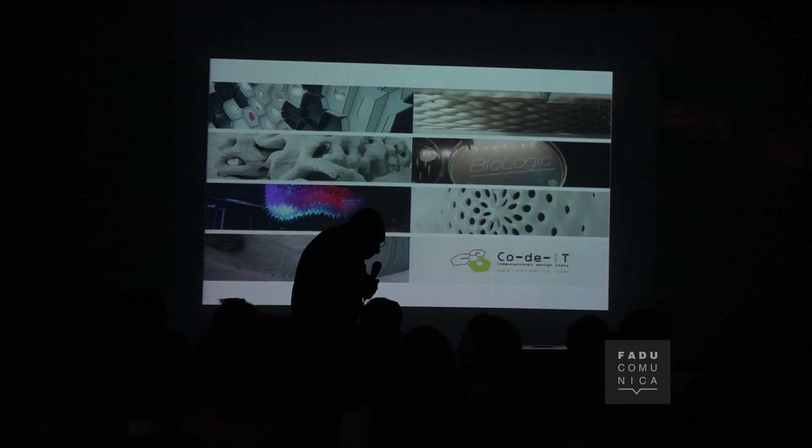As Rodrigo told you, I'm part of Co-de-iT. Co-de-iT is a sort of Italian hub about computational design, and I want to describe it as a hub because it's just connecting people that want to use computation as a design medium in very different disciplines. So the common interest is to use computation as a medium in order to describe. We are actually a huge group. Many of us are working all around the world, spread in different offices, but we are working on some specific research together.

I want to start the theoretical framework part of the lecture with a quote from Kevin Kelly. It's a quote from one of his latest books, What Technology Wants. It's not that new, it's a 4 years old book. If you don't know him, maybe you can just check on Google, but he has, I think, one of the most interesting points of view about the use of technology in the last years.

In this book, he's saying: about 10,000 years ago, humans passed the tipping point where our ability to modify the biosphere exceeded the planet's ability to modify us. That threshold was the beginning of the technium. Now we are at the second tipping point, where the technium's ability to alter us exceeds our ability to alter the technium. So we are living in a new age, a new era, where technology is changing us more than our ability to change the technology itself.

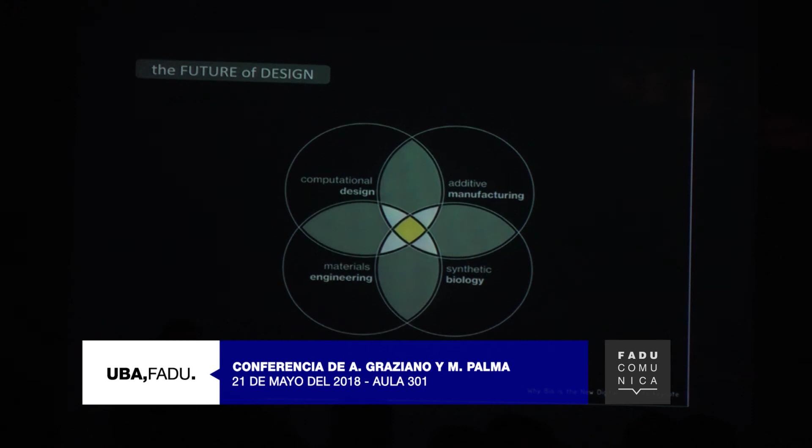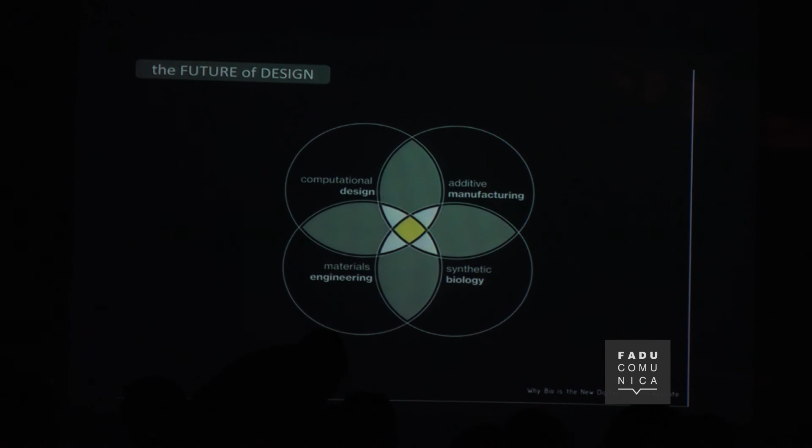During the same lecture, Joi Ito, the director of the MIT Media Lab, showed this diagram that was really interesting and is still very interesting for us. Basically, he was saying that the future of design will be a sort of intersection of these 4 disciplines. Computational design first, and we were mostly into that. Then additive manufacturing, and that was the time when we started to research additive manufacturing technologies and techniques. Then material engineering and synthetic biology. So those 4 different knowledge fields will be the common ground for the future of design.

So I want to start to show you some slides about what's going on around us and which abilities we developed in the last 10, 20 years in order to manipulate matter and materials. If we don't know our abilities, the technologies that are available to deal with materials, we can't really understand what we could do with the material itself. And as architects and designers, this is really important. If you don't know the framework where you are working, it's very hard to define your projects.

So the first slide, obviously, I think is very familiar to every one of you: a 3D printer. And Neri Oxman, some years ago, was talking about 3D printing this way. As the Gutenberg revolution allowed anyone to print books, democratizing information, 3D printing is revolutionizing the way we do fabrication. In some way, we can all make.

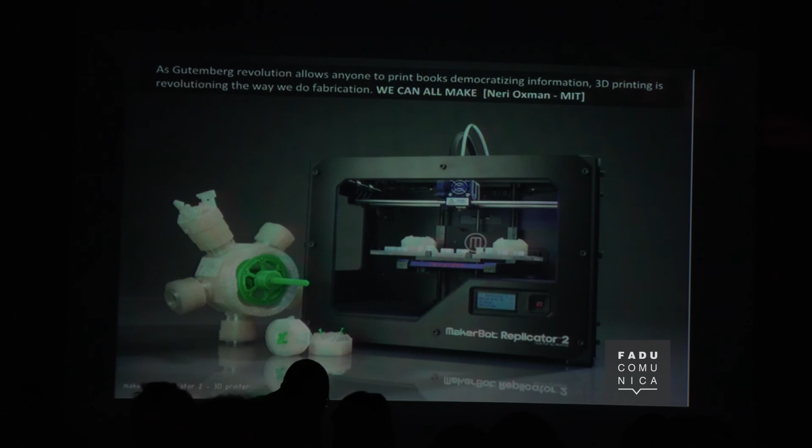But our point of view as Co-de-iT about 3D printing is slightly different, maybe, from the common idea of 3D printing. 3D printing is not just giving some shape to some materials, but a way to add several layers of information during the fabrication process. Why? In the standard 3D printer you can define how and when you release the material, and the position of the release of the material. So basically you have one layer of information, the position of the material, but in this image you can see that there is some other information about the material.

Basically there is another layer of information that is about the color. So for each voxel, a voxel is a pixel in 3D space, you can define not just the position of the material, but also the color of the material. So it's another layer of information.

Then, always in the same object, the matter could change from very stiff material to very soft one. So basically, the change of color is related also to the change of the stiffness of the material. So you have another layer of information, and you can manage the material itself going from a very stiff one to a soft one. If those are the rules that you can use in order to create your design, you can understand that you have 3 different layers of information that you can play with in order to create something.

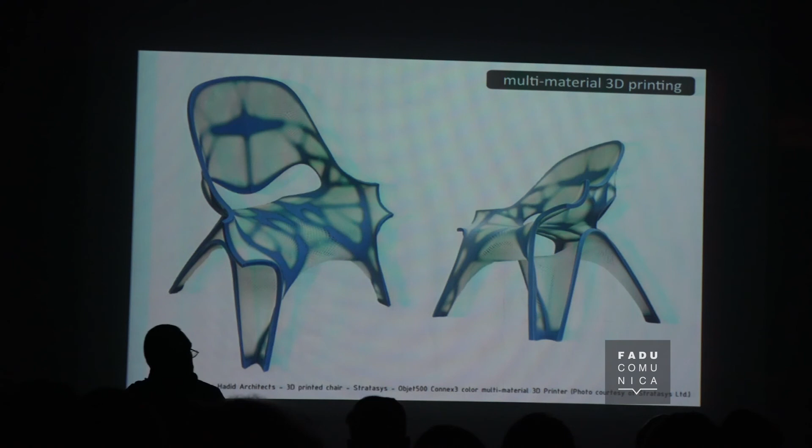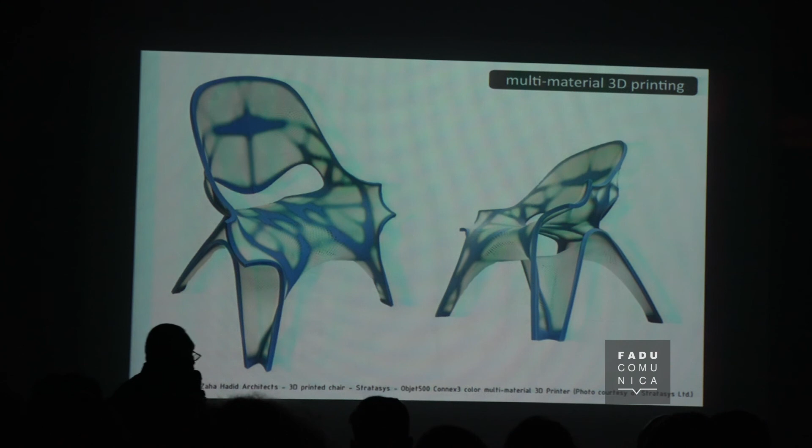And some architects, already some years ago, started to play with those kinds of technologies and the opportunities that those kinds of technology provide to us. This is a very famous chair from the Zaha Hadid Architects Studio, and basically the change of color is related to the change of density and stiffness of the material itself.

So the blue voxels, let's say, are related to the most stiff material, and the position of these blue dots is related to some topological optimization processes. So basically, you can define where you need more material and the rigidity of the material that you need in the same object.

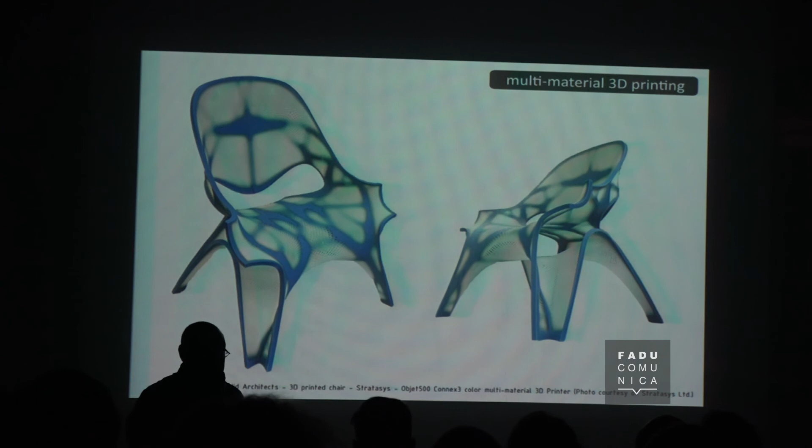So you put the rigid material just where you need it, and the other parts of the chair are really more light in some way. So you start to adopt the material just where you need it. Then we started to use the material in a very different way. This is a sort of mechanism, a mechanical part, but not in metal parts.

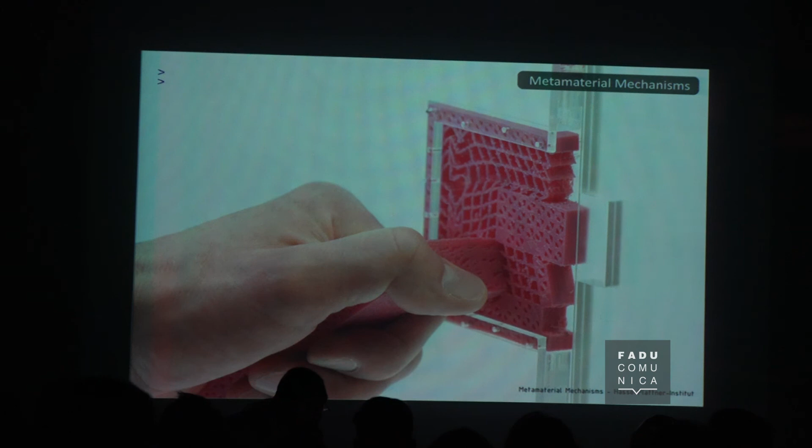It's made by some rubber, but the topology of the deposition, so how you distribute the material during the deposition, will define how the final object will work, assigning some forces to some parts. So it's a sort of door handle that really works really well, just driven by the topology of the material.

Then we started to see something really new. This is so-called 4D printing. 4D printing is not just to print something that could move. It's something really different. It's a 3D printed object with another layer of information that's about how the object behaves in different environmental conditions.

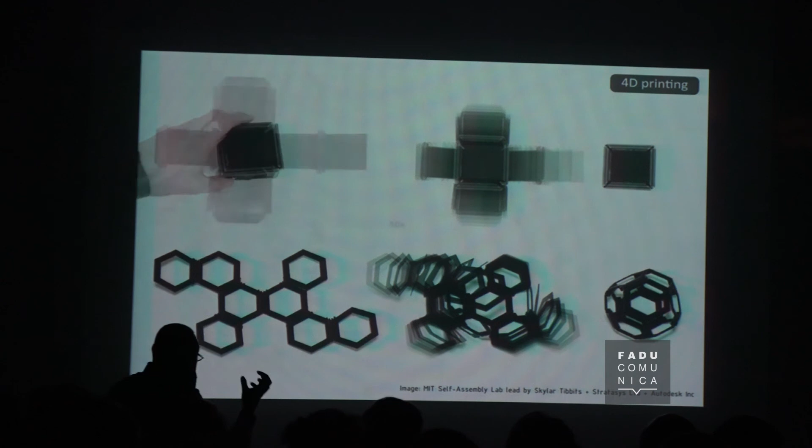For this object, that was 3D printed at the Self-Assembly Lab at the MIT Media Lab by Skylar Tibbits, there are different layers of material in this cube, and one layer is a sort of plastic, and another layer could react when you put this kind of material in water. So basically, this second layer starts to shrink in the water. And so if you know that you have this double layer, the material, when it's put into water, starts to shrink itself and will define the shape of the object in different conditions. So 4D printing is about changing the properties of the material in different conditions.

But our ability to manipulate the materials could really reach smaller properties. That's a very old image. It's from 2012, and it's about nanoprinting. So our ability to define the material properties is going to be at the nanoscale. This looks like a still object, but this is not a still object. Those are two nano mechanisms that could be printed. So you can imagine having some materials that at the nano level could embed those nano mechanisms.

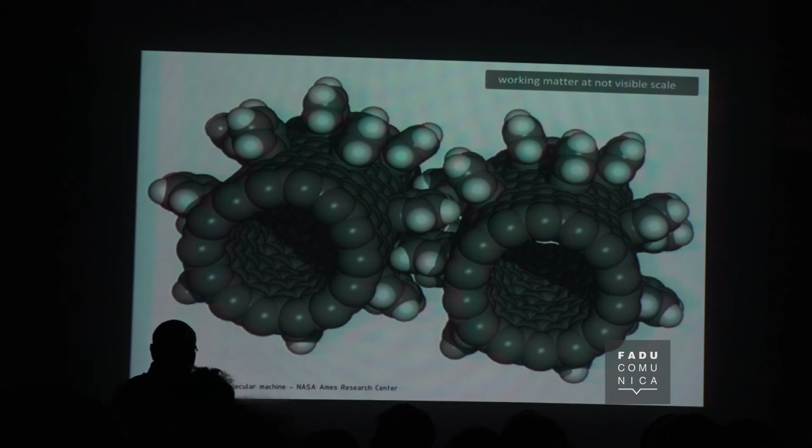Can you imagine some fabric on your jacket with those nano mechanisms, and when you move your arms, that scale of movement provokes a really big energy at the nano scale. So you can start to think about storing energy in the material itself. And then our ability could reach even further points.

This is an IBM video. It's called A Boy and His Atom. Basically, the video is a video recording of some atoms. So our ability to define the material is going to be at that level. Like this one, this is a molecular 3D printer.

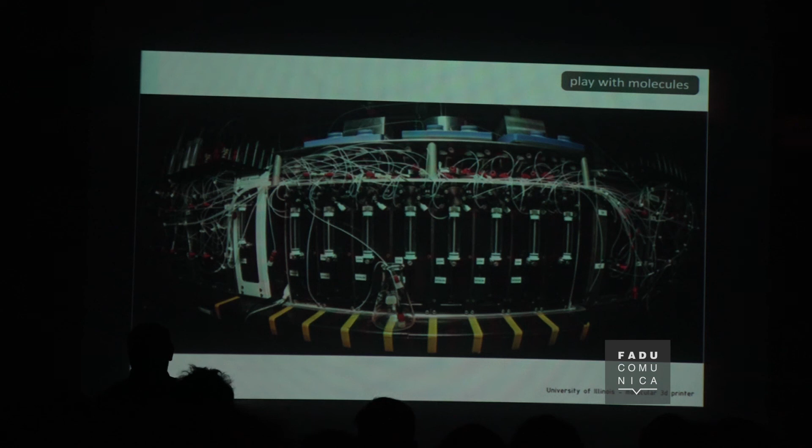So basically, you can print atoms one by one, defining the final material. If you can have all the ingredients made of atoms, you can define which is the final material that you have. So those are the technologies that are actually available, obviously not in architecture, not in design, still not, but it's going to happen.

This is, for instance, a material that could change from solid to liquid by the atoms' connection, driven by some magnetic forces. So basically, we can define some material that will change state, from the solid state to the liquid state, by some magnetic properties.

Then, our ability to manage different materials started to jump into a completely different field, that is the bio field. So 10 years ago, this was one of the first companies, EnvisionTEC, that put this 3D bioprinter on the market. Basically, it was a very expensive one. It was about creating and printing some bone parts or soft tissue or drugs or bio skin in order to replace the skin in injured persons.

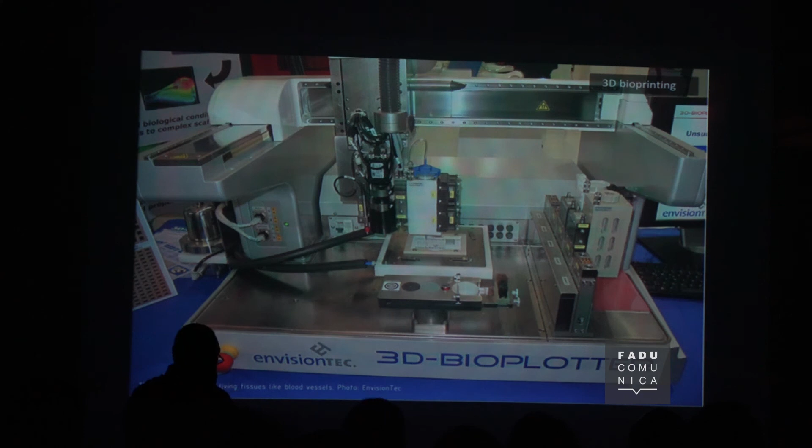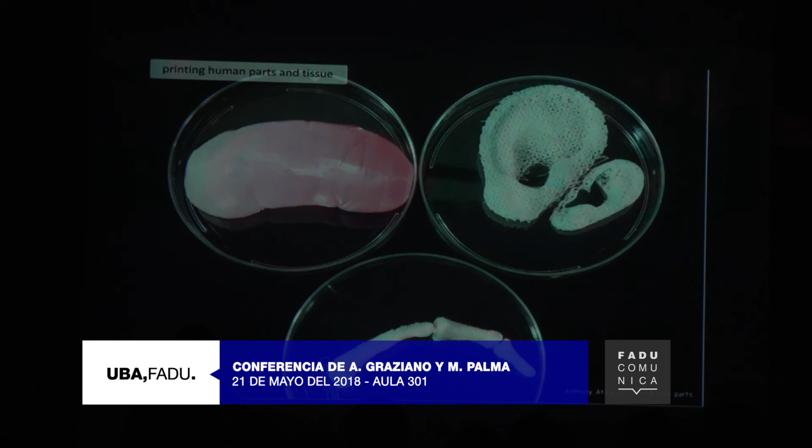Anyway, this 3D printer started to show that not just the common materials could be organized with these kinds of processes, additive manufacturing processes, but also biomaterials. And in a couple of years, some doctors, this image is taken from research made by Dr. Anthony Atala, started to 3D print organs, basically. You can see a fully functional kidney on the top left, then some scaffolds for new ears, and some finger bones.

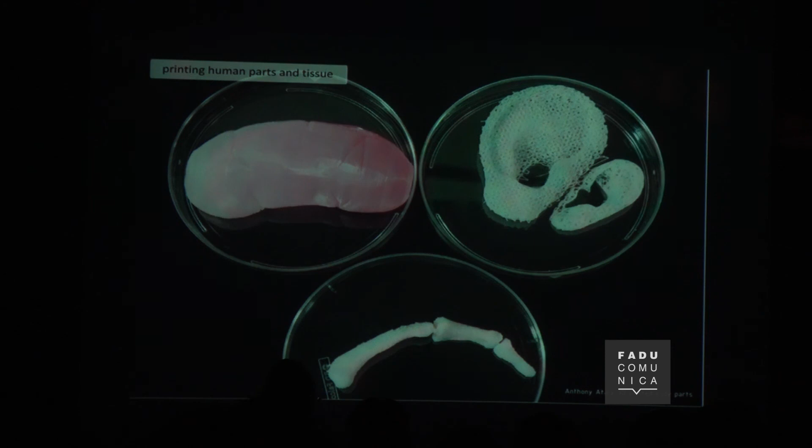So we started to jump into a completely different field where we could start to imagine using biomaterials. This is an image coming from the Wyss Institute, and it's about using some composite biomaterials that change their properties when those structures are placed in water. So the material itself started to react and change its shape.

This is another very famous project from the MIT Media Lab. It's called BioLogic. It's a sort of fabric that reacts to changes in temperature and moisture. So basically, it's made by some biocomposite. The name of the composite is natto. It's something that is inside the rice stalks, and it's a material that changes its length. So basically, it shrinks by the atmospheric moisture. So as a fabric, if you wear it, it changes shape driven by your temperature and your level of moisture.

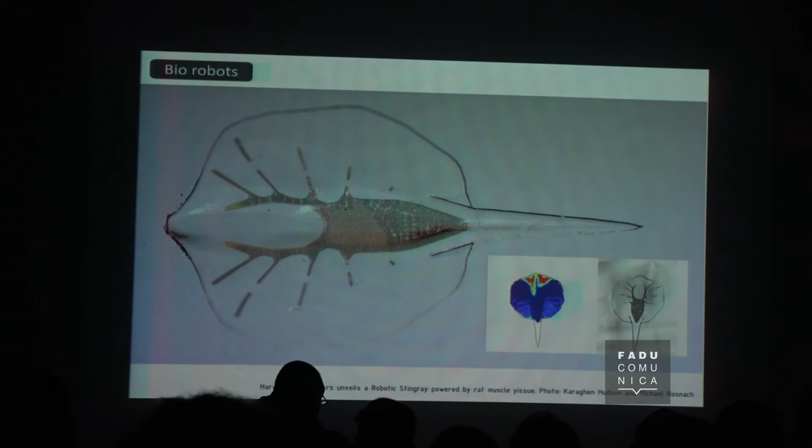But our ability to work with biomaterials is going further, and this is a project called Stingray. Basically, it's a completely 3D printed object. The skin is made by a gold part, and the living part is made by rat cells. Basically, the rat cells were modified in the DNA code in order to react to light stimulation. So as you can see in the very small images on the right, with the right amount of light, the 3D printed object started to move its own shape according to the light source.

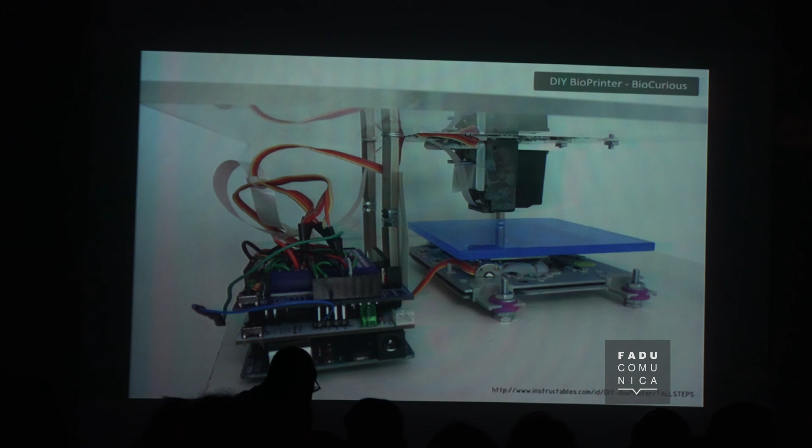But if you think that all these kinds of things are really far from you and really expensive, this is a very old image from 2010. This is a DIY bioprinter made by the BioCurious lab in Sunnyvale. It's a project to make a 3D bioprinter with $150. So it's a technology that you can download from Instructables, a very well-known website about DIY technology, and you can download it and assemble it on your own.

And those are the first tests that they did in the lab, basically 3D printing some food for some glowing bacteria. So basically, if you're 3D printing the food position, the glowing bacteria will obviously reach the food, and this is the final result.

But we are literally entering a new era of design. And we also have to define and understand our position as architects and designers in this kind of new framework. For at least 15 years, a lot of industries have been trying, and in the last 10 years they also figured out how, to decode DNA sequences. So basically, we are able to read the DNA code of every living being and to sequence the instructions inside of it. And our ability is not just in reading DNA, but also in writing DNA.

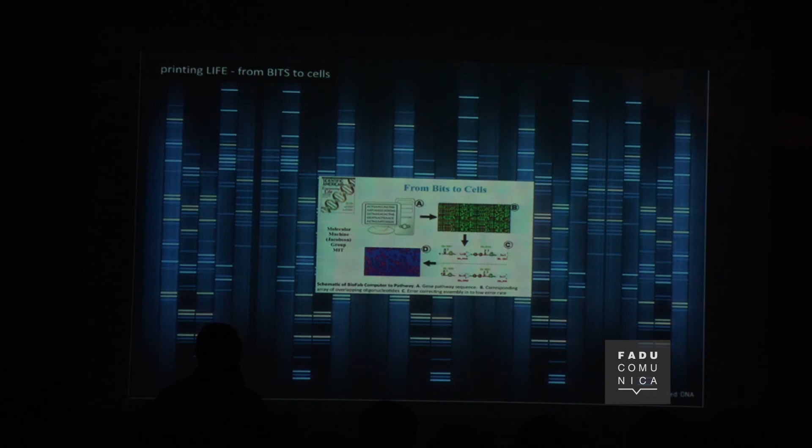If 10 years ago writing a string of DNA was really expensive, now it's something really cheap. You can read the entire human genome with $100, and you can write it with $1,000. So it's something really cheap, actually. And some institutes started to think about what it means to be able to read and write DNA.

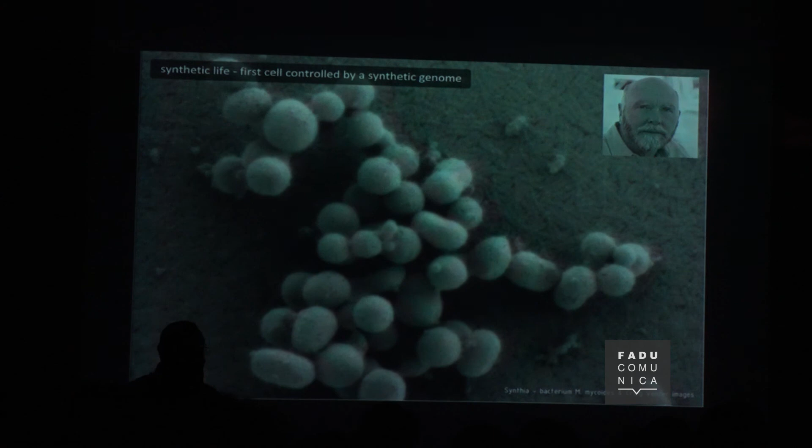It's called the Mycoplasma mycoides, and they extracted the DNA from the scaffold of the bacteria. Then they completely discarded the DNA itself and kept just the scaffold. Then on a computer, they programmed the new DNA, and they fit the new DNA inside the old scaffold. And after a few hours, the bacteria started to do two things that are the fundamentals of life: eat and reproduce. Those are the foundation of life.

So basically, for the first time, we have a completely synthetic form of life on the planet, something that we code. It's very important. And since this experiment, a new scientific field started to arise. It's called synthetic biology, and basically it's the design and the construction of biological devices and systems. So actually we have the opportunity or the ability, I don't know how to call it, as an architect or designer, to start to think not just with still matter, but also with materials that are biomaterials, and to think about it in terms of design.

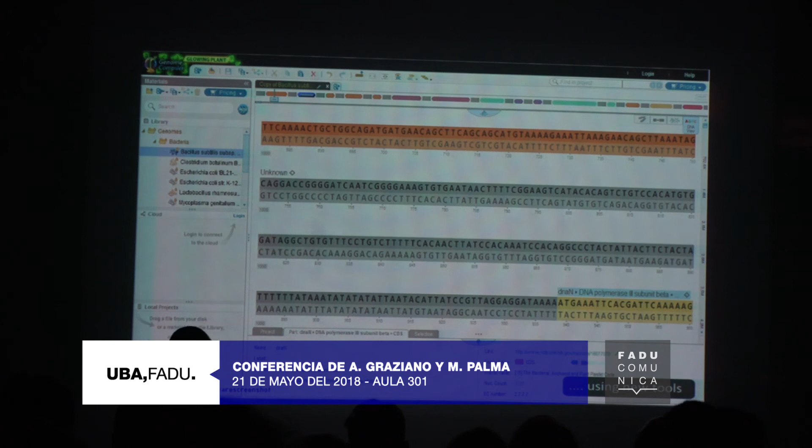And if you think it is, again, something really far from you, this is a screenshot from my laptop. This is an app where you can start to take some samples of DNA strings from very different sorts of bacteria. Those apps are free, and you can find around 1,000 on Google Play. You can start to take some strings and to play, or to design maybe, it has more sense. But you can start to play with the DNA strings.

Maybe you can't read that, but on the top right, there is a button with the name pricing. So basically you can start to play with it and then ask the price in order to print it. I did it 2 years ago. In 3 days, you have the new strings of DNA inside the pipe. Obviously, I don't know what to do with it, but just to test the process. Keep in mind that just in the United States, the number of bio garages where kids and very young people are playing with biology is more than 1,000. The FBI has a new department just for that kind of thing.

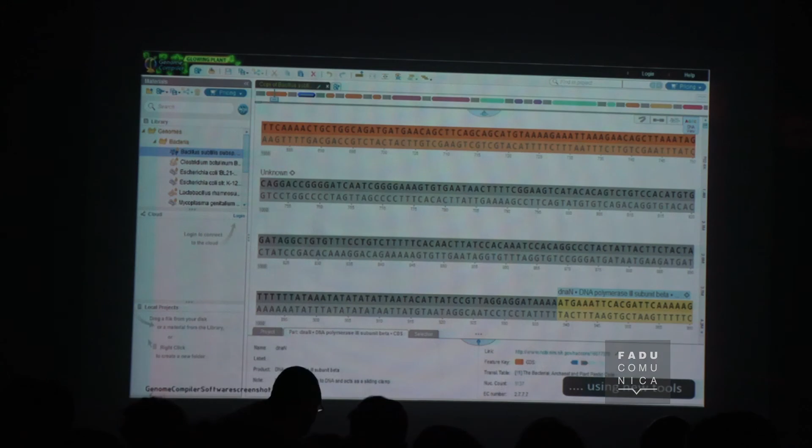So what we were doing on our laptop using the usual code, the 0 and 1 language, is happening also on the other side, using the molecules and the cells as hardware and the DNA as operative system. Keep in mind that the DNA is the operative system of nature, okay? So in those last 10 years, we are building the bridge between those kinds of languages. So actually, we are able to jump from one side to the other, from 0 and 1 to ATCG language.

And obviously, I'm pretty sure every one of you is asking, okay, why do I have to be interested in that? Why is it very important for my studies and so on? This is an image I took from the Skylar Tibbits website maybe 3 or 4 years ago. It was about 3D printing the longest chain possible in a fixed size volume, okay? How can I fill the space with the longest chain?

It has a very specific name, this process, that I don't remember now because I can't read the slide. Sorry, I will check later.

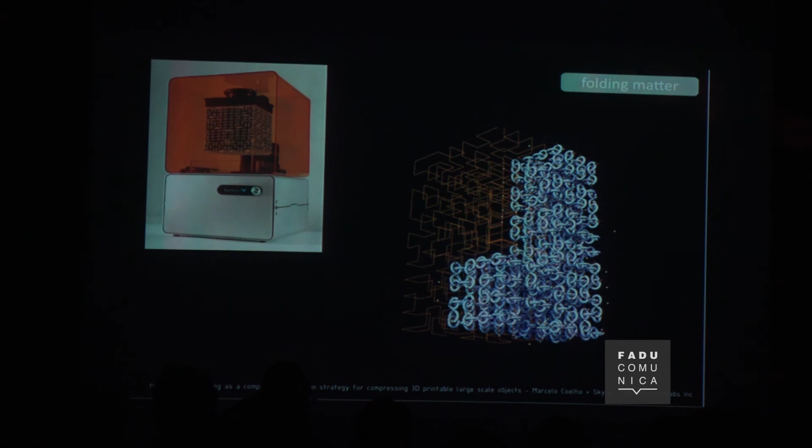Anyway, you have to build an algorithm that is filling the space with a specific object. The same is happening in biology, because the way the DNA works in order to read the sequence itself and start to trigger some specific function is defined by the way you fold the DNA. So folding the DNA is the way you define at which time every string will be activated. So folding the DNA is a very strategic way to define how a biomaterial is working.

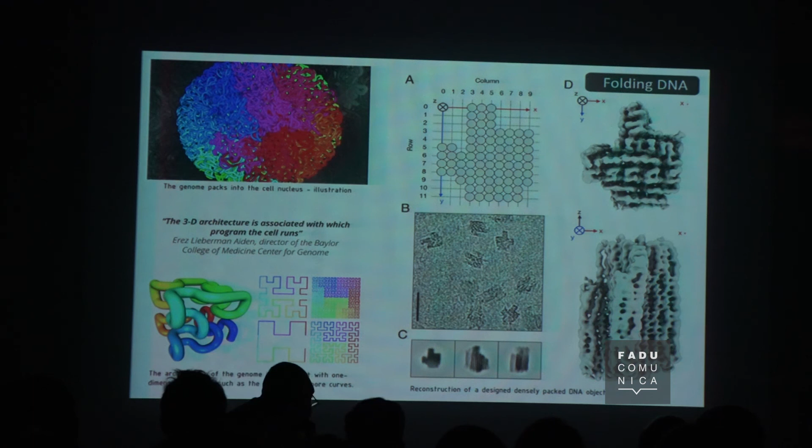And as you can see, they are using exactly the same tools, exactly the same computational approach. So computation is the bridge between something that is happening in architectural and computational design, and on the other side in biology. And if you don't trust me, this is a 4 years old image from the Autodesk website. Autodesk has been working for years

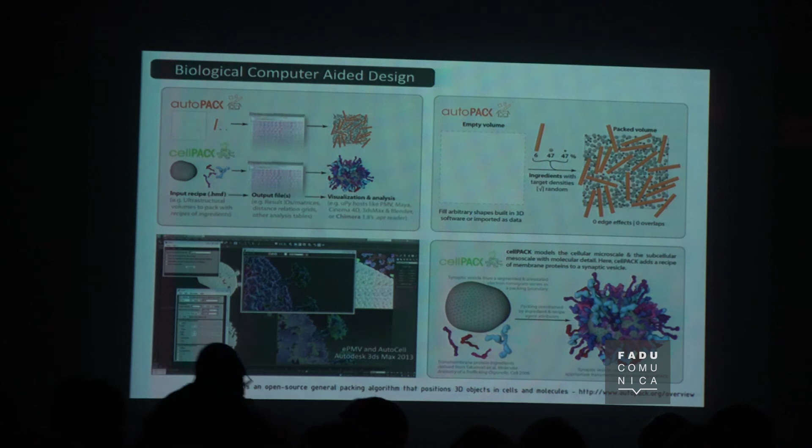on a project called Project Cyborg, on some software in order to design and define the biological properties of the materials. Those are some plugins you can install on 3D Studio Max, on Blender, on Maya, all the computational graphics software, in order to start to define the bioproperties of the materials.

So this is another quote from a very interesting interview with Andrew Hessel. Andrew Hessel is a bioprogrammer leading the Autodesk research project. And he was saying every living thing on the planet uses the same operating system, uses the same programming language, from bacteria all the way to us, and everything in between. DNA is the program of living things.

So now we have a clear path from bits to atoms. You remember the famous MIT slogan, from bits to atoms, to biology. We actually are becoming responsible for every living thing on the planet and choose what we want to create. Not survival of the fittest, but construction of the intended. The next programming paradigm is life science.

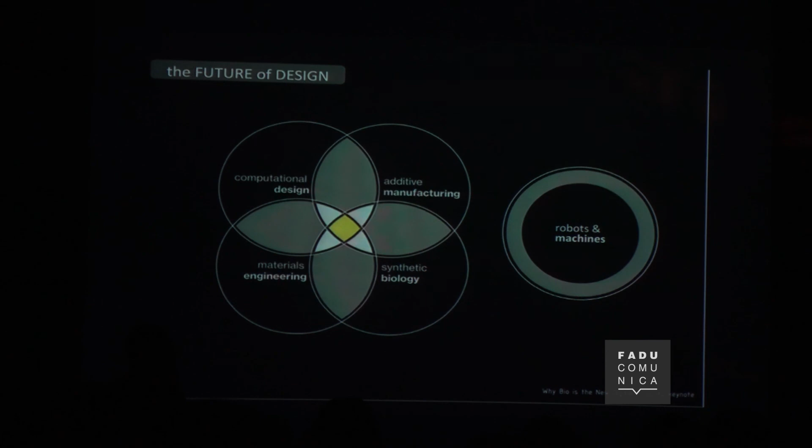I have to shortcut a little bit because I'm running late. And I want to go back to one of the previous images I showed to you. Do you remember the four fields that Joi Ito was using to define the future of design? I would add another one, because in those four fields, we are missing the actors. Who is going to do that?

And I think that robots and machines are another very important field of research that we need to start to use and to explore. We are witnessing the rise of computation as the design medium, and this is something that we already understand. But we also need to define how we do that and how we use our processes in order to inform the material.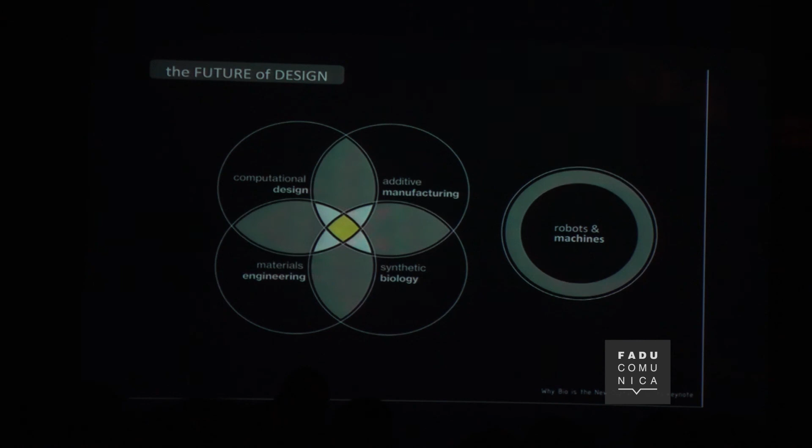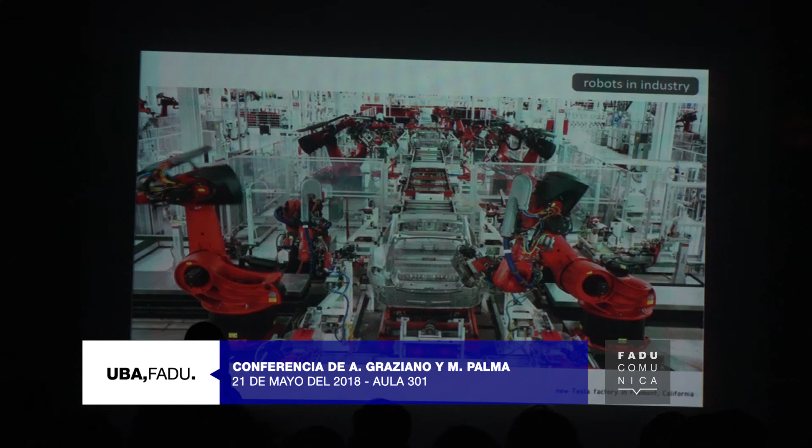I consider robots and machines as technologies that are able to execute series of instructions. So I'm not just thinking about 6-axis arms or something like that. We can range literally from very small robots to very big ones, very different also in topology and morphology itself.

This is the new Tesla factory in Fremont, in California. And as you can see, the robots are widely used, but robots have been in use for 40 years. Robots are really old in some way. It's a 40 years old technology, and obviously it's already in every automotive company, in aerospace factories and so on.

This is the daily shipping in Shanghai from KUKA, one of the biggest companies all around the world. So in the next 2 years, China alone is planning to sell more than 2 million robots. So you can imagine how robotics will be in some way pervasive in our world.

But since, I could say, 10 years more or less, architects and designers are also starting to be interested in the use of this kind of technology in the architectural and design fields. This was one of the first, let's say,

robotic performances I saw, made by an Austrian studio, Kram/Weisshaar, and it was about cutting some stools using an app where you define 3 curves, and the intersection of the 3 curves in the 3 directions of the stool will define the final shape. And in a few days, they were able to collect very different shapes from different participants to the event. So it was a way to show that robots were not that far from something that could be related to

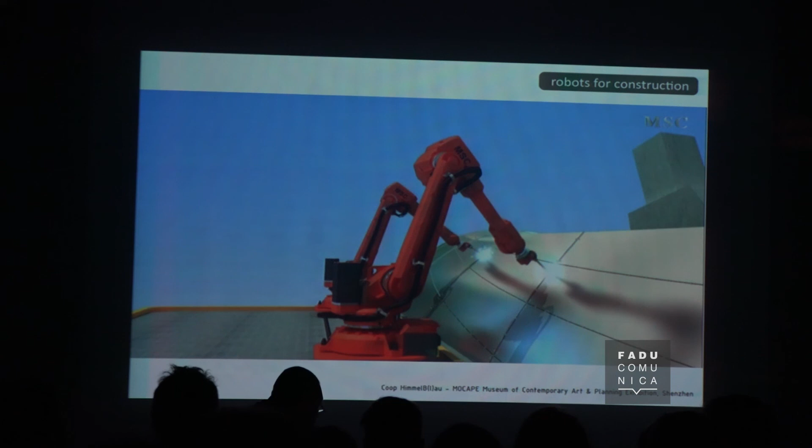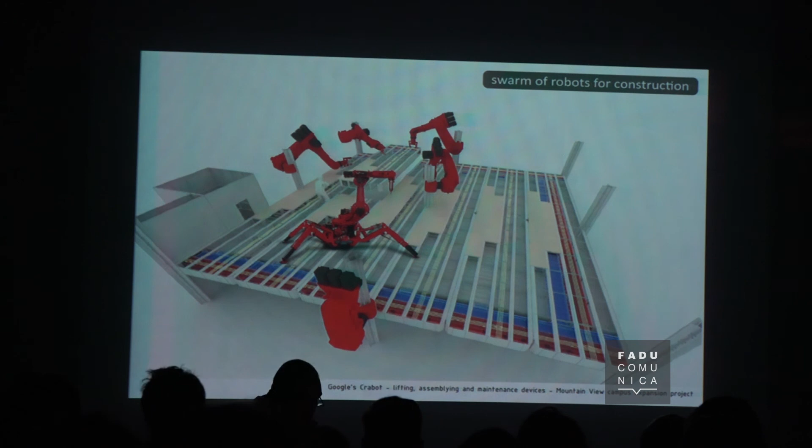So architects are starting to get used to thinking not just about the material or the shape of the building in itself, but the processes to build and to use those kinds of technology on the building site. This is another image from the supposed Google headquarters. And as you can see, the robots are not just robots anymore, but there is a sort of speciation of the robots. So robots are going to be different because they have to solve different functions during the building process. So basically, there will be robots that will deliver the material, other ones welding and doing different tasks.

This is one of the most famous robotic pavilions in which robots were extensively used. And I really like to think of this pavilion as a sort of paradigm shift in architectural design and processes. A new generation of architects and designers are starting to get used to those kinds of technology, to understand the language of the technology itself, and to start to use the technology in the building processes. I don't want to say in the building in itself, but we are talking about building processes.

In this specific pavilion, for 1 year, the PhD students and the master students started to develop not just the shape that is inspired by some biomimetic properties, but to define the tools, to build the tools in itself, to define the materials, because they literally designed the materials that they used, and then the process in order to build the pavilion itself. So the students and the PhD students were able to define the entire process from the very first idea to the building process in itself.

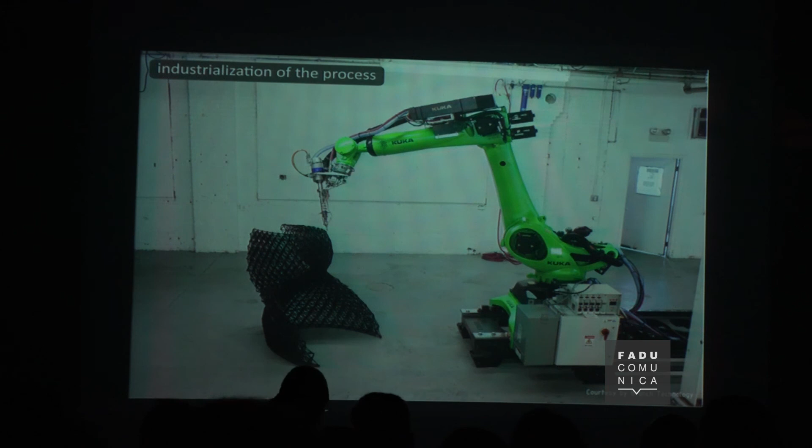And this is something that is going further. I think one of the main bottlenecks that we have now in order to move from the research lab to the industries is first the regulation of this kind of process. It's very hard to move from a lab to the certification of the processes itself, but it's going to happen. It's just a matter of time, probably. Few companies are actually on the market, but the number will grow for sure. And they started to deliver this kind of additive manufacturing process in the real building site world.

This is another example, a very new one, the MX3D bridge made by this company. Basically, they 3D print metals, and they 3D printed the entire bridge in one piece, let's say. It's not exactly true, but a very big one. And there is a huge amount of research behind this project, not just in order to understand how the welding process that was used by the automotive industries until now could be useful in architecture, but how to use the robots in a completely different way.

Because when you think about the robots in the automotive industry, they are doing the same operation 1 million times. In this specific way, you are doing one specific operation with the robots each time. So everything will change in the control of the robots. You need a faster way to approach the robot, to program the robot itself, and to use new tools all the time.

So it's a very challenging project, but I think very successful. And this bridge will be put on the site in the next months. And one of the main difficulties will be how to certify the bridge, because there is no technology or any kind of software that could certify how this kind of new technology, new 3D printed object will work in the real world. So basically, it will be a sort of a test, a living test, full of sensors in order to understand how this technology will work.

Okay. So, can you hear me? Yeah. Good evening, everyone. I'm just showing you a quick video about what I'm going to talk about next. So please enjoy.

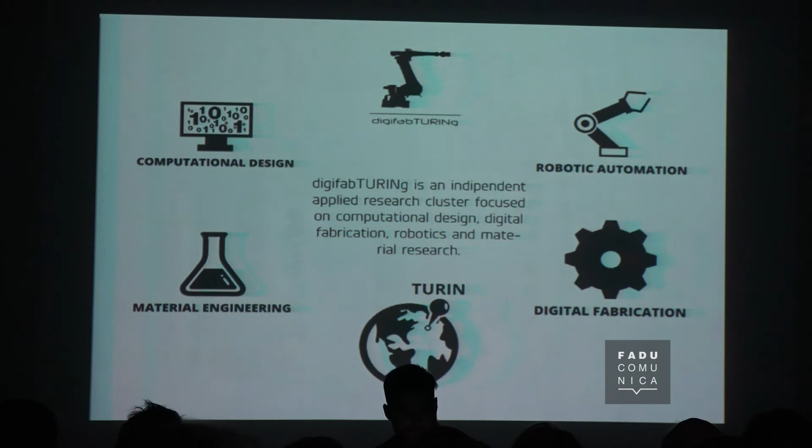In particular, we like to think about digifabTURING as an independent applied research cluster. Independent meaning that we are not part of the university, but we are somehow self-funded. So a research cluster that works around the areas of computational design, robotic automation, material explorations and engineering, and digital fabrication.

Starting from these ideas in October 2015, more or less, we took part in a call for projects that was aimed at supporting transdisciplinary ideas in the areas of arts and technology. So we wrote a project proposal called ARM, Algorithm, Art, Robot, and Material, that was aiming at exploring the artistic potential of industrial robotics and additive manufacturing. And our precise goal was actually to produce a series of artifacts at the domestic scale.

We were lucky enough to be shortlisted, and actually we got fully funded. That means that in 2 years, we were able to do many things. First of all, we used this financial support to activate a research and development program aimed at developing software and hardware solutions for additive manufacturing. And specifically, we focused our research lines into 4 different areas, each one related to a specific material system, so to say: clay and ceramics, thermoplastic polymers, biologic materials, and tension-active systems.

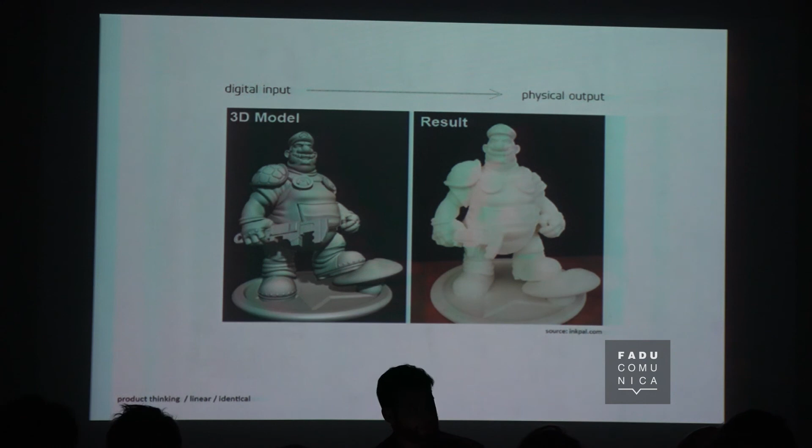What does it mean? It means that we would like to get rid of this conceptual boundary according to which what we model on the computer and what we fabricate are exactly identical. So we would like to skip this idea of thinking in a linear fashion, where the product is the exact copy of what we were designing on the computer. What we would like to promote with this research is another approach, which is feedback-based, so that the digital and the physical domains are just two complementary instantiations of the same set of information.

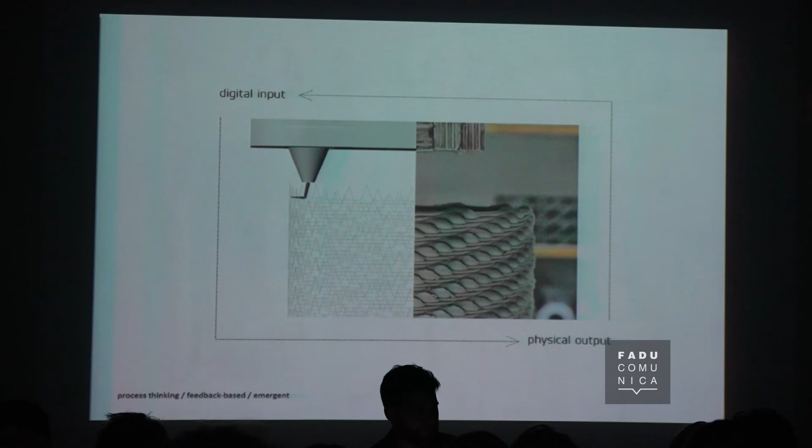When we start thinking in this framework, we start thinking about a system of elements that are influencing each other interdependently. That means that our setup is not just a computer, but a system of components like a robot, the code, the material, and the end effector that constantly inform each other during the fabrication process and the design process.

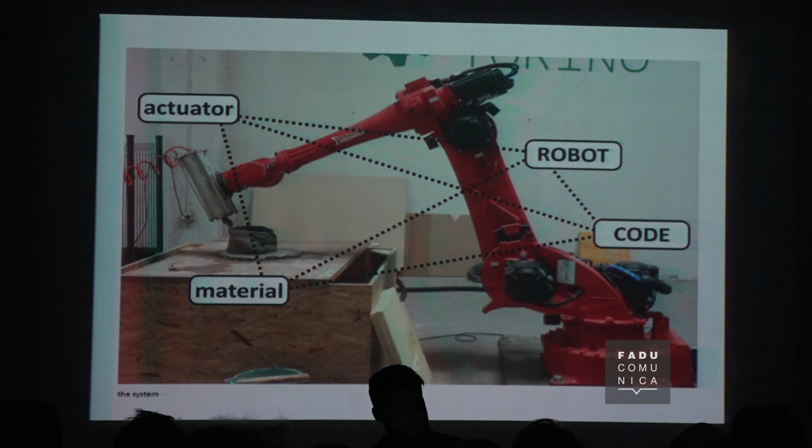So let's say that every small change that is introduced in the system at every one of these levels has an influence on the final physical outcome of what we're going to produce. In order to control such a system, we needed to develop tools to control it.

And what we are getting from this as an output is a set of information that the robot can read and interpret, but not only the robot, also the tool that the robot is moving in the space, which is depositing or releasing the material. So it's quite a complex setup, but that's actually fundamental in order to generate the information that the robot and the fabrication setup need in order to work.

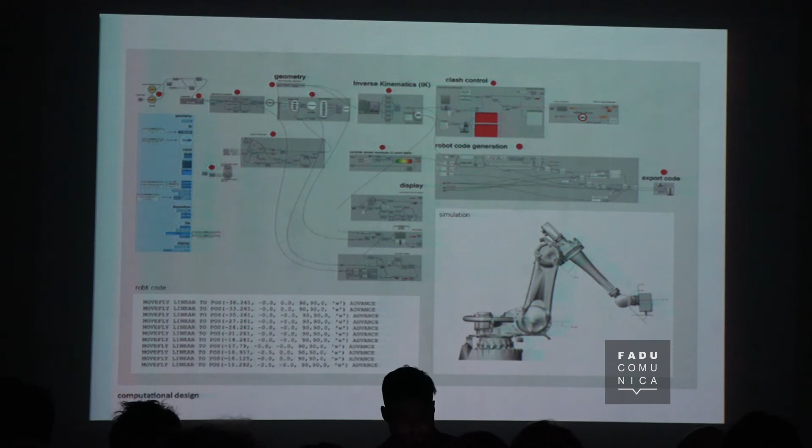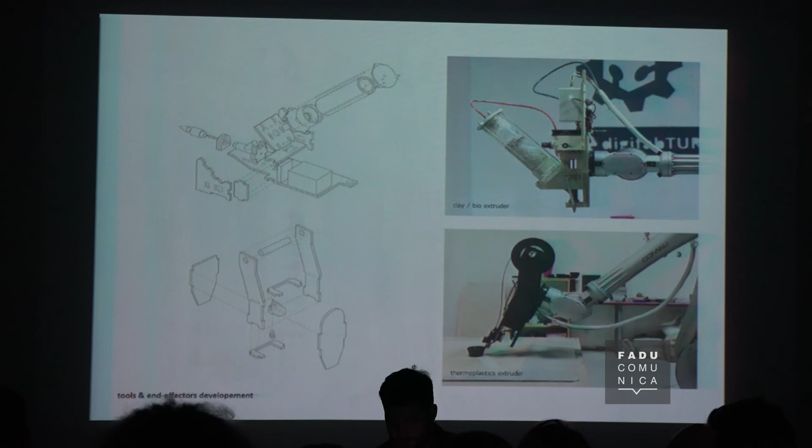By the way, all of these, both the software and the hardware solutions that we developed, are free to download at our GitHub page, because part of the goal of the project was to make these technologies open and available for people to replicate such an experience. These tools are actually made out of very cheap components, off-the-shelf parts that you can easily find in any hardware store or on Amazon.

And this doesn't necessarily mean that the man is the one who is programming the machine, but in order to work with matter and with material, what's needed still, and what will still be needed in the future, is the knowledge and the sensibility and the sensitivities for the material, which is typical of the craftsmanship attitude to work. And it's something that very hardly is going to be replaceable by other forms of intelligence, so to say.

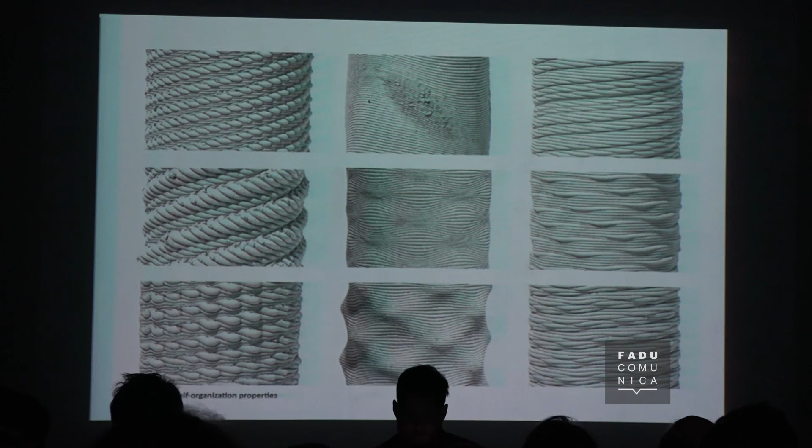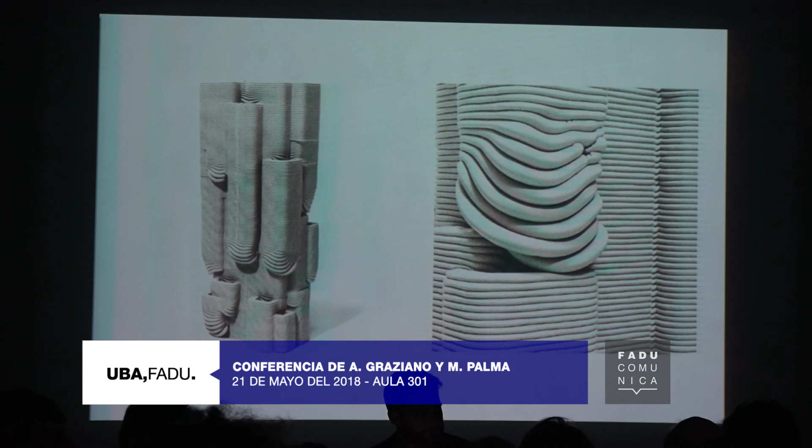The research went on up to the point of approaching these early explorations with a clearer design intention, in order to express our own personal interpretation of the system potential. And we started to generate a few series of objects as designers. This, for example, is called Gravity. It's a series of clay bodies where, intentionally, during the fabrication process, the deposition starts to get out of the boundaries. So the gravity and the self-weight of the material is actually self-organizing in this way.

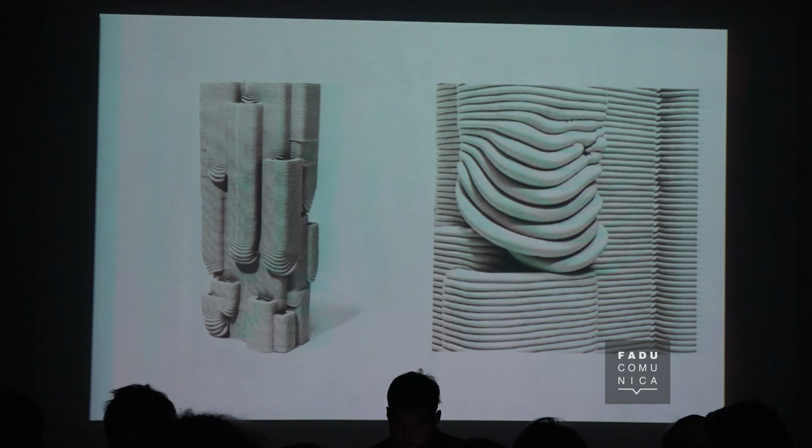Or, for example, this other series that we called 6-axis, because this sort of material deposition would not be possible with a standard 3D printer because it only moves on a vertical axis. By exploiting the full kinematic potential of the robot, we can actually start escaping from the vertical lines and the vertical extrusions, and we start to squeeze the material in different directions, also exploiting, of course, the soft properties of the material.

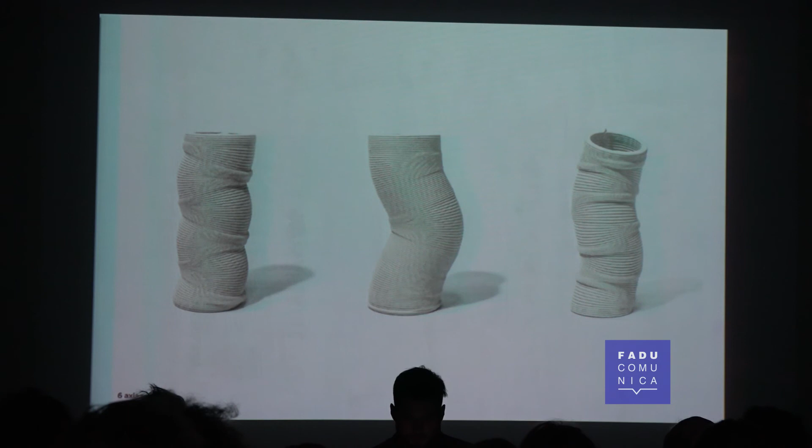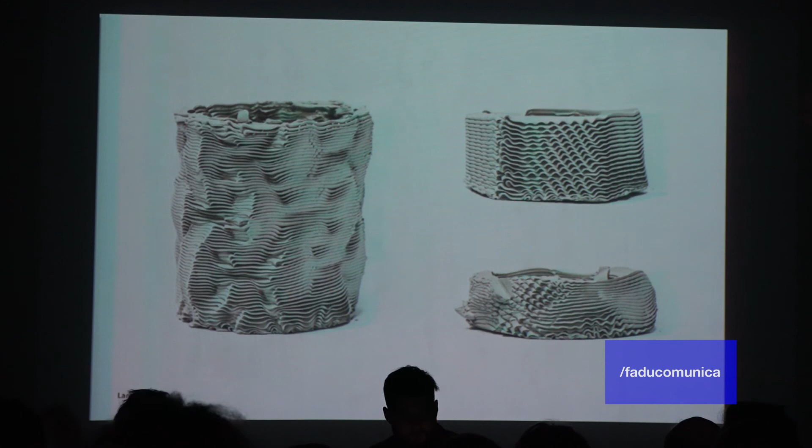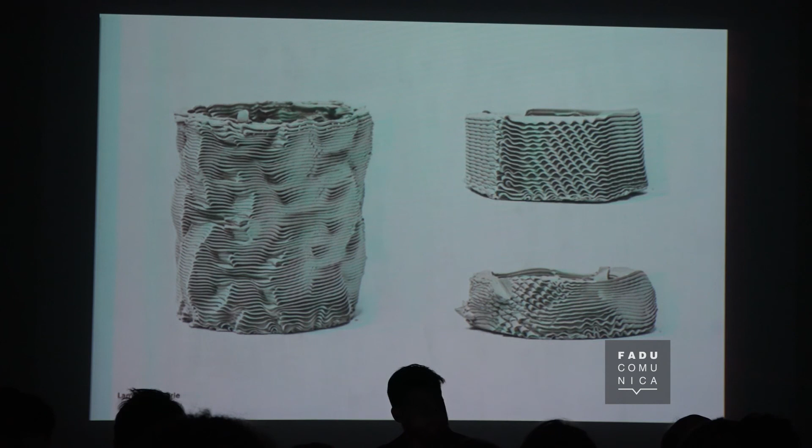This is another very interesting effect of our research, because instead of working with a standard circular nozzle, we started to work with a 45-degree cut nozzle for pastry, basically. And once again, all of these effects, which are extremely complex, extremely fascinating, are not modeled. They are just a self-organization of the material during the deposition process. The material starts to laminate according to the directionality of the nozzle during the printing process.

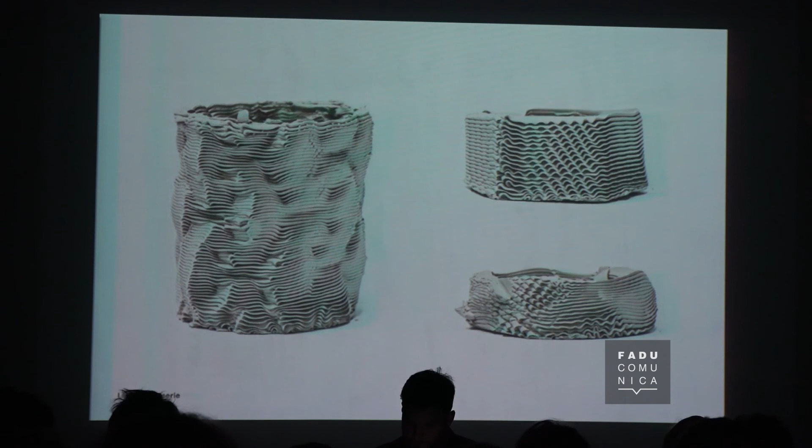The clay project, to a certain extent, could be considered almost concluded, in the sense that from these very early explorations that we showed you before, we arrived at a level of control of the whole process that we defined some pieces which could be considered almost products, almost reaching the product stage. So at some point we were also trying to sell them, but that became another kind of work, and we didn't want to pursue this for the moment.

But if any one of you has good marketing skills, please contact us.

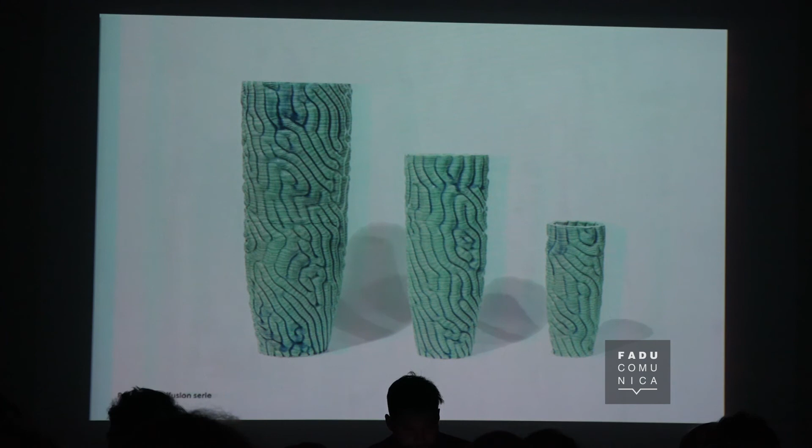All right, so then let's skip to the next research line. It's called Informed Polymers Matter. As you can imagine, it's about plastics, thermoplastic polymers. We were using the standard materials for desktop 3D printing, so PLA, ABS, PETG, polypropylene, and so on. And on the other end of the spectrum from the clay project, this research line is more about control rather than flow, if you get what I mean.

We actually started experimenting with this special and, I would say, non-standard way of using 3D printing technology. That means that we are not superimposing layers one on top of each other, but we are actually releasing materials in all directions of space.

This process may look sort of simple, but you have to trust me, it involves a really high and deep level of control over the robotic movements, over the computational aspect of it, because every line that is drawn is actually informed with different properties, with different information related both to speed of movement, quantity of material extruded, temperature, delay time in order to let the material cool down, so to move again and not to drag the material away while you are printing.

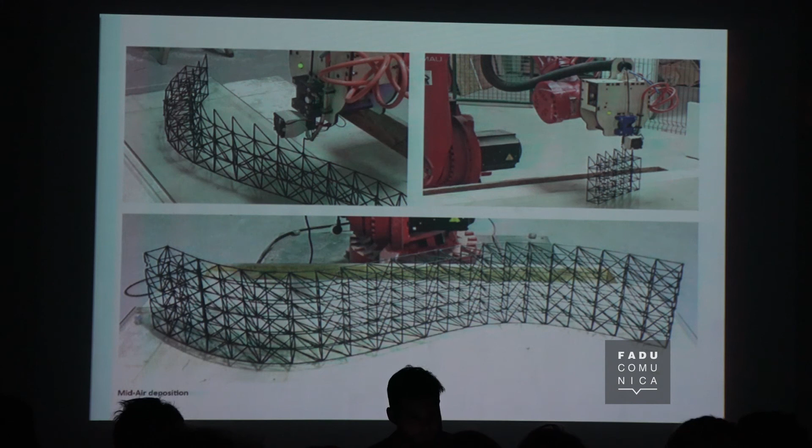Also, the same level of complexity has to be somehow mirrored in the extrusion phase, so in the tool side of things. So, as Andrea showed you before, these sort of structures are already being engineered by more than one company, especially one called Branch Technologies, and they are producing in the same fashion free-form space frame structures that are used to design and build partition walls. So they're actually getting in the real world as a technology.

We also tackled standard 3D printing by trying to move away from desktop 3D printing in terms of scale and in terms of speed of production time. So basically, 3D printing is still at very high resolutions, like a standard desktop 3D printing. It requires a long time for fabrication.

Since we are actually able to use quite a big machine as an industrial robot, it has like 2.3 meters of horizontal reach, we decided to try to print bigger and with much time saving. So here we designed a very simple prototype of a table, and we also designed a series of suspension lamps in PET-G.

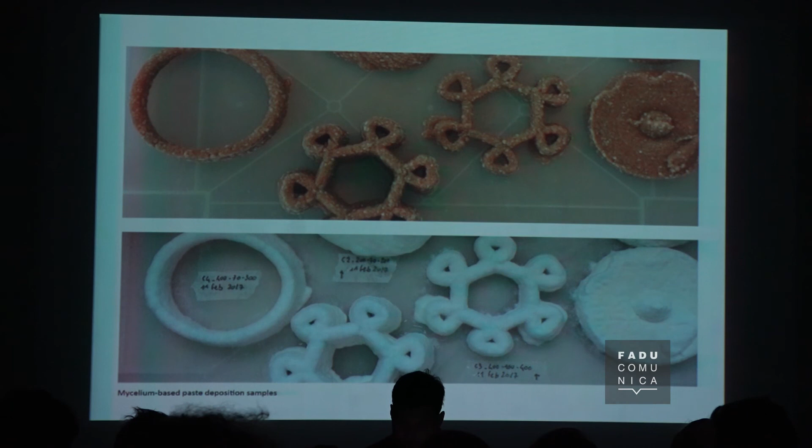But after 2 weeks, it completely changes its own mechanical and also aesthetical properties, and it turns out to become extremely lightweight and extremely stiff. Why? Because in this brownish toothpaste are already inoculated spores, in this case of mycelium, which is a species of fungus which grows at the nanoscale in a sort of extremely dense network of cells, which has this look.

Actually, it looks like the cheese you leave in the fridge for too long and you start to see this fur. Actually, these are hyphal cells, which are the main constituent of fungi. This extremely dense network is permeating the whole paste that we were printing, because this paste was filled with nutrients, which is basically cellulose, the main ingredient and the main food for fungus.

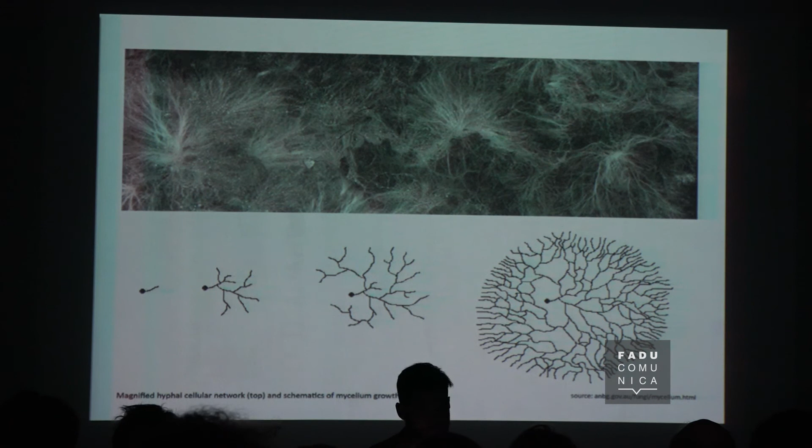The biggest part of the research is actually related to the material definition and the material engineering in order to make a living organism be extruded with a robot. It's not easy because it requires a lot of fine-tuning, a lot of attempts, a lot of knowledge, also in terms of how to handle the material, where to make your tests. You need a sterile environment, otherwise the fungi are dying or getting rotten.

So with Maurizio Montalti, we ran one of the workshops, and it was very successful in terms of participation. Many students came, and we divided them into groups in order to test with different kinds of fungi, with different kinds of binders, with different kinds of recipes in order to develop their own recipe for the extrusion of mycelia.

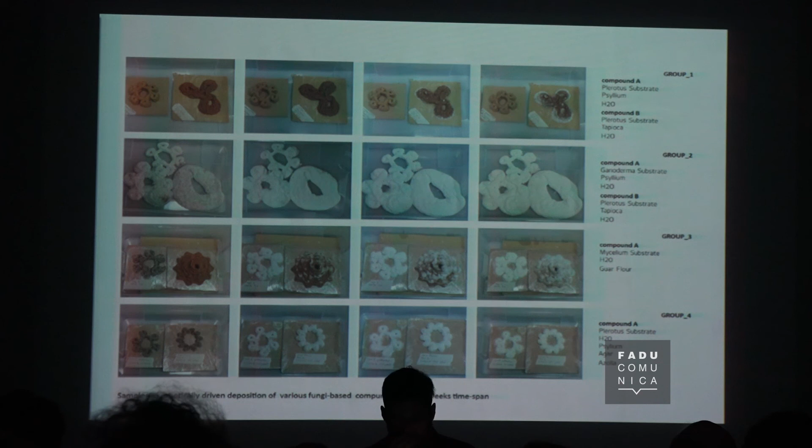I was mentioning that the European Space Agency also got interested in this technology, because basically, if you think about a mission to another planet, most of the costs are to cover the travel. So if you want to build some structures on Mars, you don't want to bring with you tons of bricks. You want to bring the people and maybe some machines and maybe some food, but you cannot afford to fill your spaceship with bricks.

So ESA got extremely interested in this possibility of growing your own construction material on site, because basically cellulose is just a waste product. It's wood dust, wood chips. It's a very cheap material. And the fungi and the spores of mycelium, you can just bring them in a small plastic bag, a few grams.

So that's why the advanced concept team of ESA is extremely interested in this sort of technology. We hope to continue to push this research with Maurizio Montalti and, of course, with ESA, because it's extremely interesting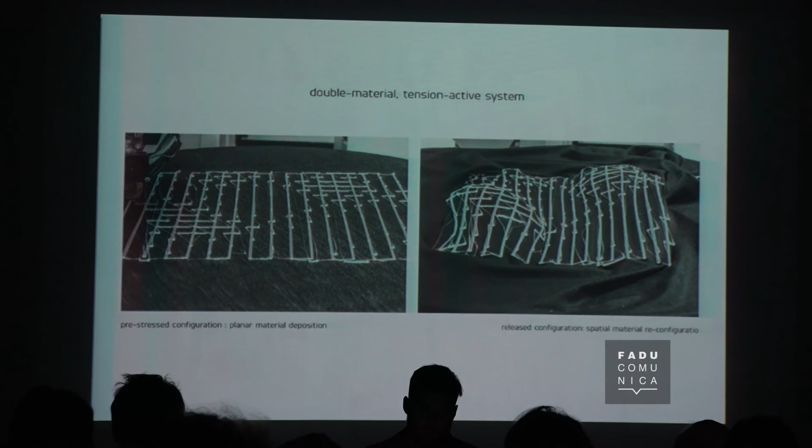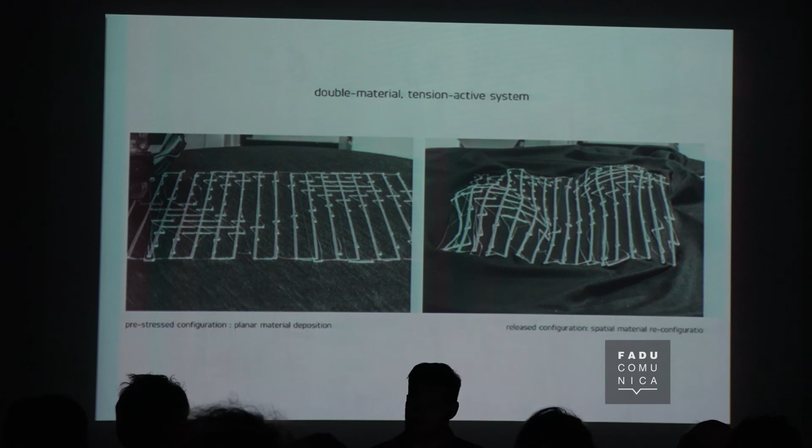While the fabric is in tension, you deposit material which adheres to the fibers and actually fills the gap between the layer and the mesh of the fabric that you're printing on. And this acts basically as a physical constraint, so that when you are releasing the tension of the fabric, depending on the geometry that you were printing on top of it, the fabric goes from a two-dimensional configuration to assume a three-dimensional configuration.

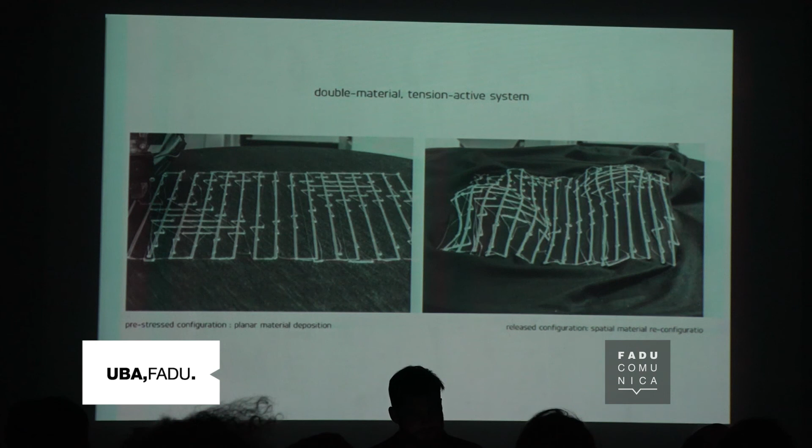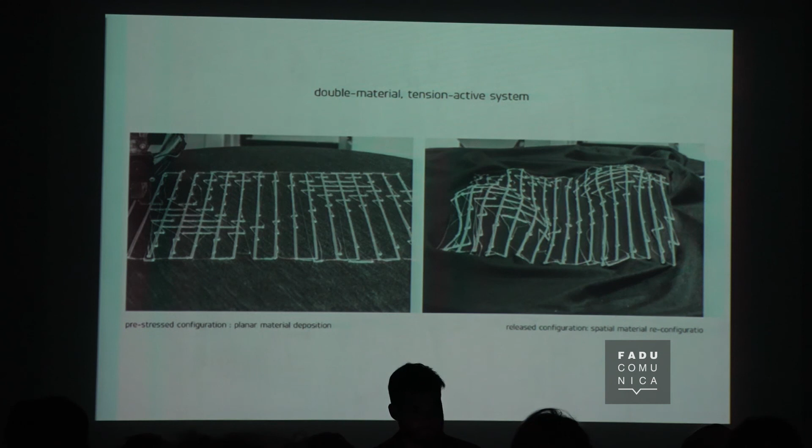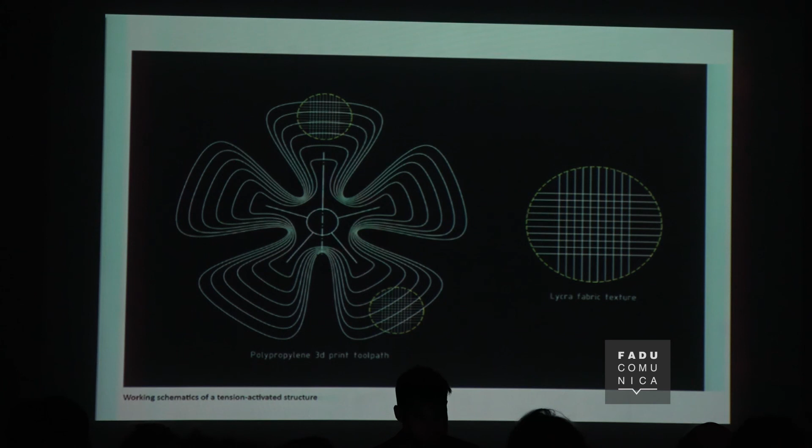Just like the clay, the effects of this system are not known in advance, or it's extremely difficult and computationally expensive to simulate. That's why it's a very engaging and fun project to follow. It's very useful also, this is just my opinion, in terms of teaching students what are the consequences of their drawings, somehow.

And this actually triggers an immediate feedback loop in the design process, because you draw something, you test it very quickly because it's an extremely quick process. You go back and you try to adjust it according to your design intentions. Or maybe you just follow the material behavior in order to explore some new possibilities.

We did a workshop with 10, 15 students, and in 3 days we produced more than 150 samples. And since the aim of our research project was to design house and domestic scale objects, we decided to take the experience of the workshop and in 3 days design some suspension lamps.